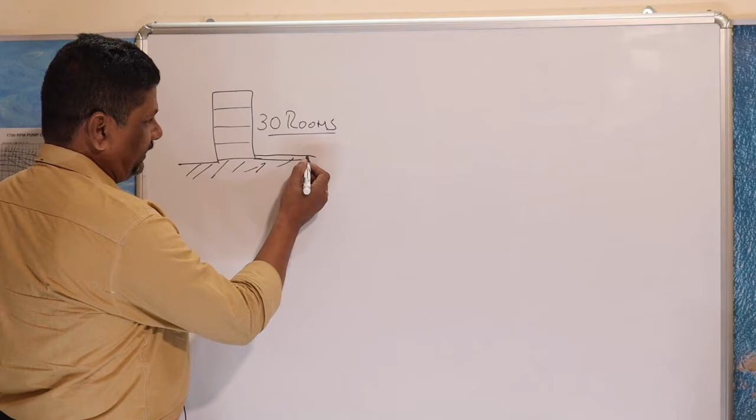So what I'm going to have here is a hotel which has some floors, and this has 30 rooms. We are going to calculate how much wastewater this hotel is going to generate and where we are going to collect it. Probably what I'll have is an underground sump.

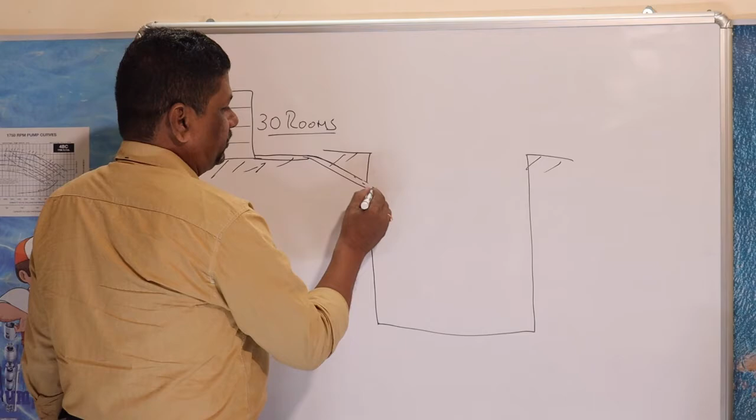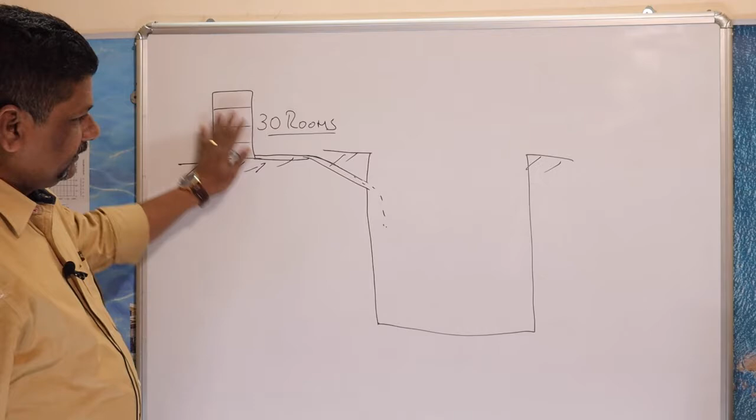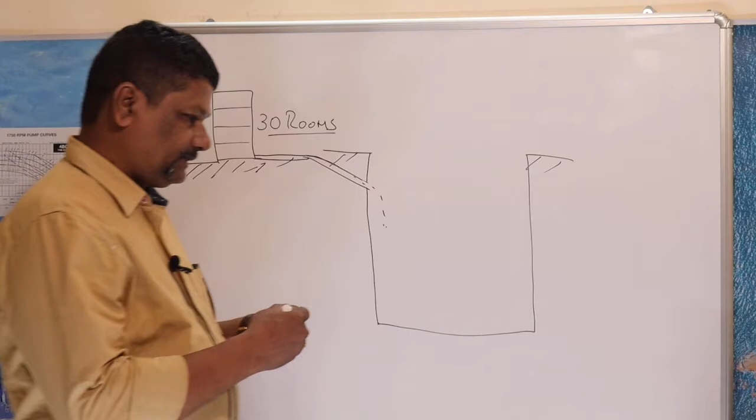Like this, and I will be taking the wastewater here, and the sewage is going to come here. So this is my requirement. I just wanted to explain that I'm going to collect all this sewage or wastewater into this pit, but I need to know how much I'm going to generate from here so that I can design my pit size. So for a moment, just forget this pit - I drew it only to give you an idea about what we are going to do.

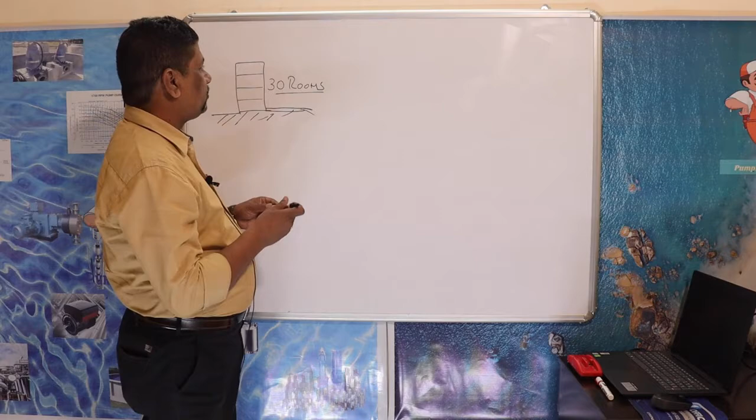Now we are going to calculate. Since it has 30 rooms, the first one I will take is a shower - each room will have a shower. The second, each one will have an EWC, and the third, a wash basin. The hotel will also have a kitchen sink, and the washroom will have a tap point.

Since it is 30 rooms, I am going to take 30 showers. EWC is going to be 30. Wash basin is going to be 30. Kitchen sink is probably 3. And tap is 30.

When you come to water, you have discharge units, and you add all the discharge units together. Remember I told you how to calculate with Hunters, and also how to calculate with BS 6700, using BS standards. The same way, just like discharge units, here we have loading units.

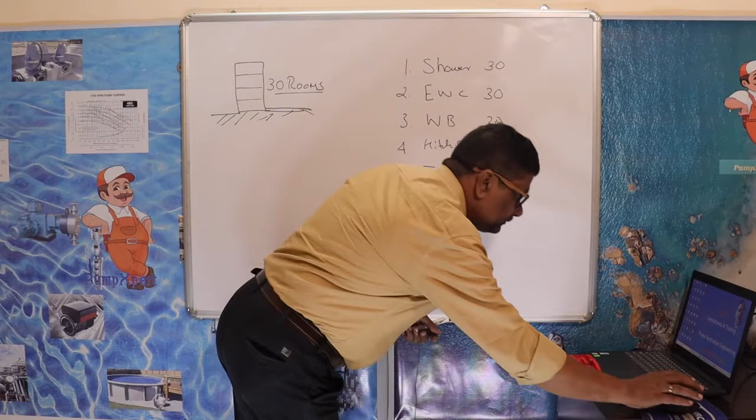Let's check from the table what is the loading unit for shower, EWC, and so on. Then I'll tell you there's a small formula you need to use. So we'll take it as 2.

This is the table that we predominantly use, as per BS 12056-2:2000. If you take the first point where you have the wash basin, that is 0.3, which is called the discharge unit, so we'll take it as DU, and this is 0.3. And the western toilet - if you look, it's a WC with 6 liters - it will be 2. So we'll take this as 2.

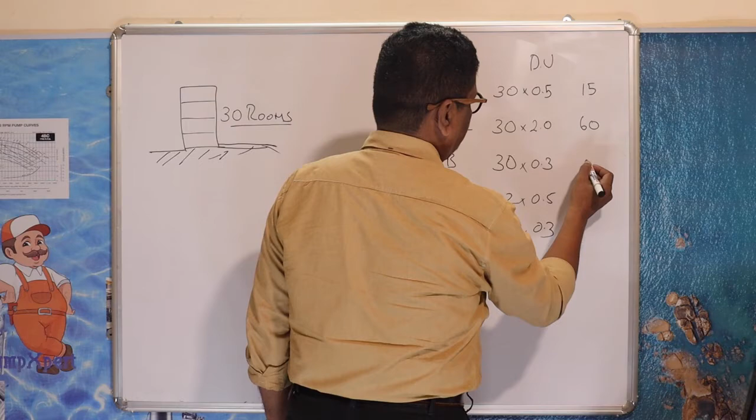So if I multiply all this: 30 into 0.5 is 15. 30 into 2 is 60. 30 into 0.3 is 9. 2 into 0.5 is 1. 30 into 0.3 is again 9. So I am going to arrive at a sigma DU of 15, 75, 84, 85, 94 - so I have sigma DU as 94.

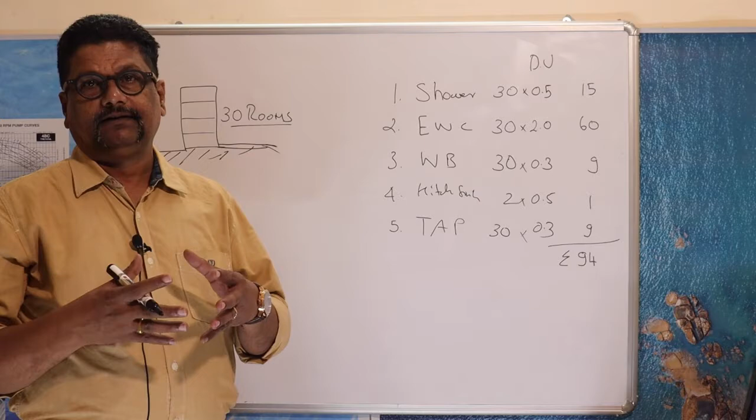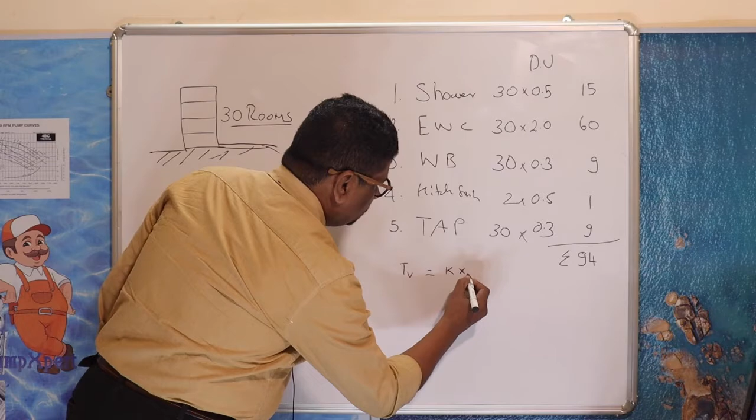But I need to convert this into a unit where I can know what it actually represents, and the very simple formula in LPS is: total volume equals K into root of sigma DU. The K factor here is in the next table we need to see. Here we have hotel, and it is 0.7.

So what I'm going to do is 0.7 into the root of 94. So that's equal to - can you find it out?

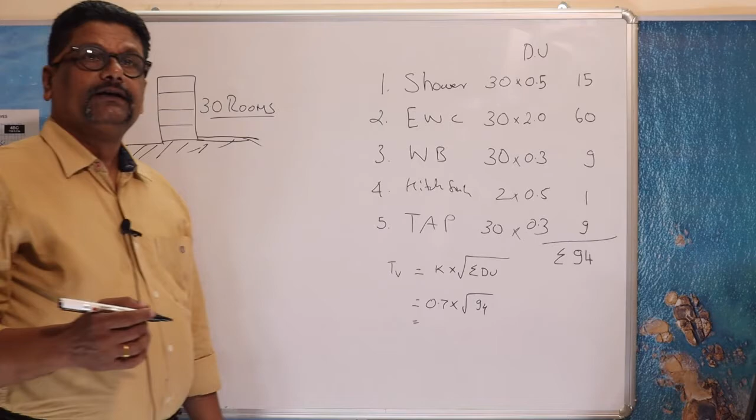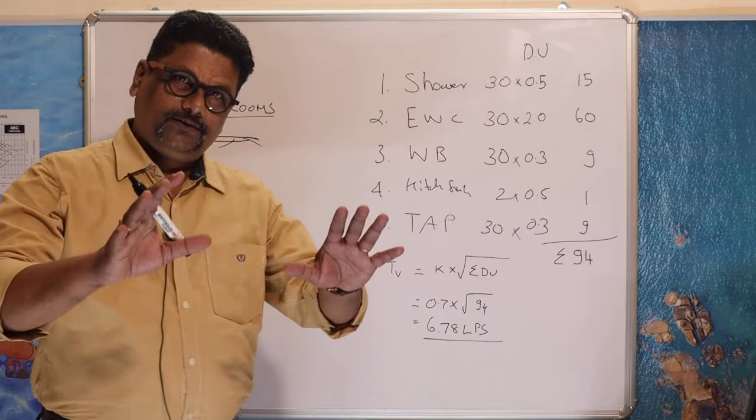6.78 LPS. So now you can see how easy it is to calculate how much wastewater I am going to generate from a 30-room hotel. You can apply this same principle if you have a huge township, or if you're having a hotel with many rooms, like star hotels which might have about 100 rooms.

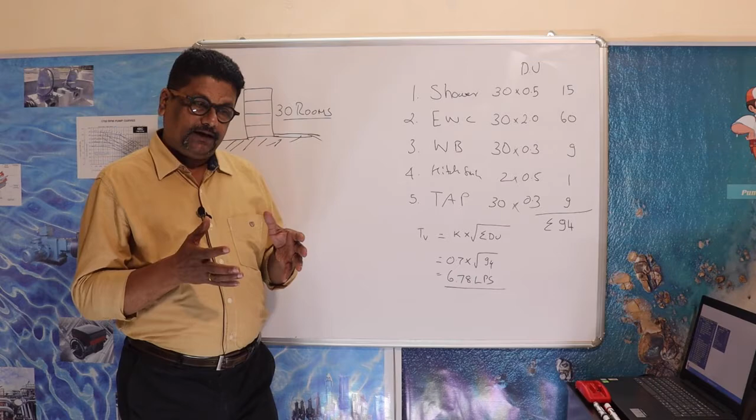You can apply the same thing for resorts. But in a resort, you need to be a little careful about dimensioning all this. Probably in one of my lectures, I will take a resort as an example and application, and we'll calculate the water demand and wastewater demand separately, because it has a lot of varying demanding factors.

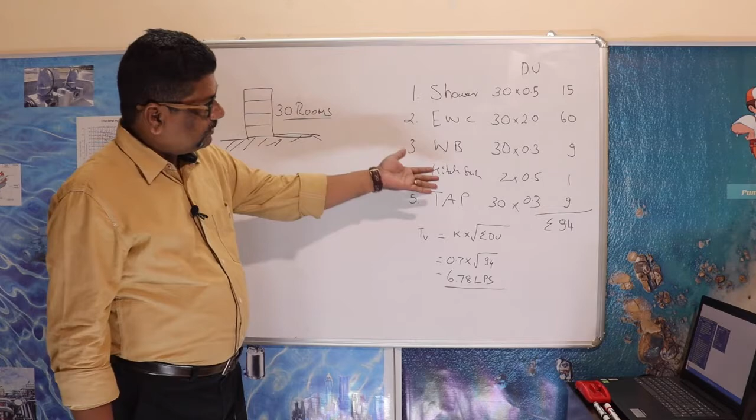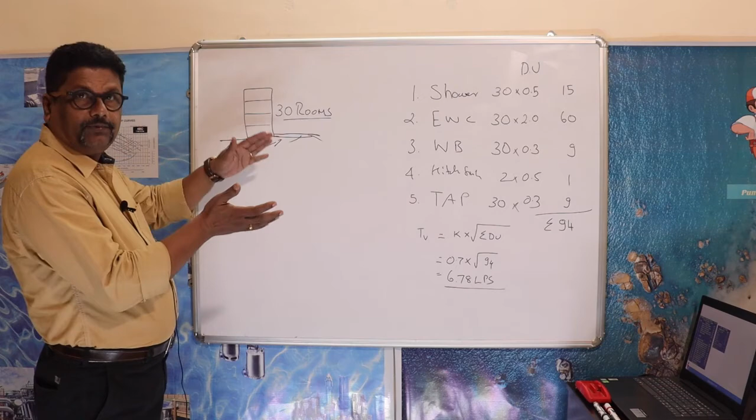But here, you can take this as a 30-room hotel, or a flat which has so many washrooms, and you just put that all calculated and arrive at 6.78, which is your peak demand for wastewater. In the sense, when the hotel is in operation and the peak demand for water is between 7 to 9 in the morning, you get the same kind of peak demand in the wastewater generated. So that's about 6.78 liters per second.

And now I have got the flow rate. With the flow rate, can I design a pumping station, or no? What other information do I need? We will see that later, but now I have this 6.78. I also need to calculate the head, because only after getting my flow and my total head will I be able to select a pump. And the selection of the pump becomes very, very important when you have to design a sewage pumping station.

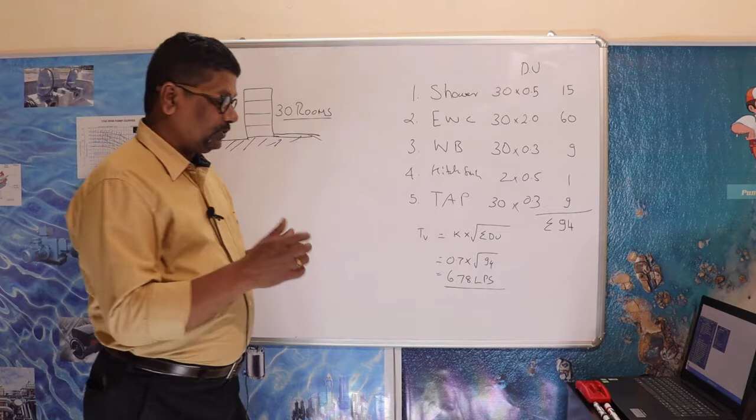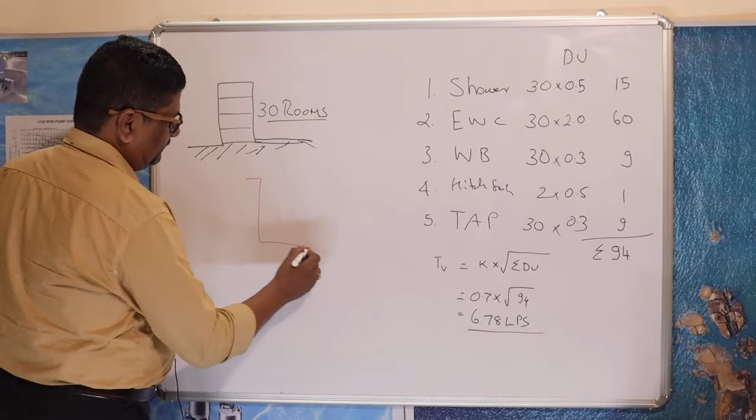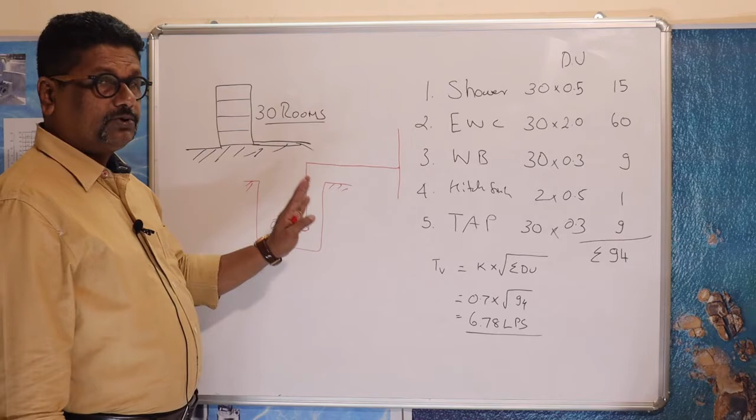So in this example, what I'm going to do is calculate the head. As you can imagine here, I have a pit, and I'm going to put a few pumps, and from these pumps I'm going to pump it. I have the sewer line here, and I'm going to put it into the sewer. This is going to be my system. I'm not taking the STP and other things into consideration. I'm just taking a simple example to show you how to calculate everything, and once there is an STP, that's going to be a different calculation.

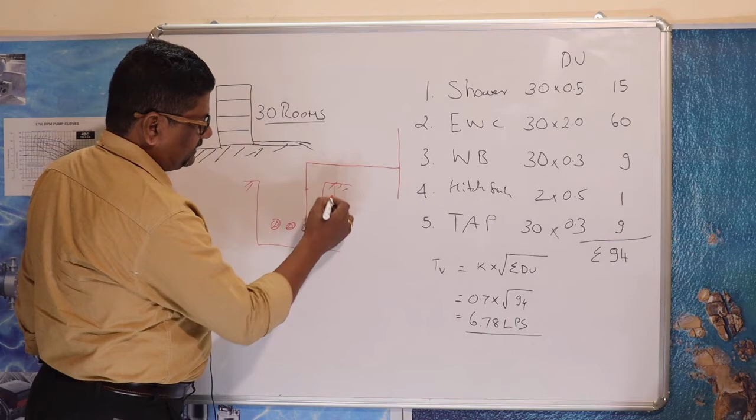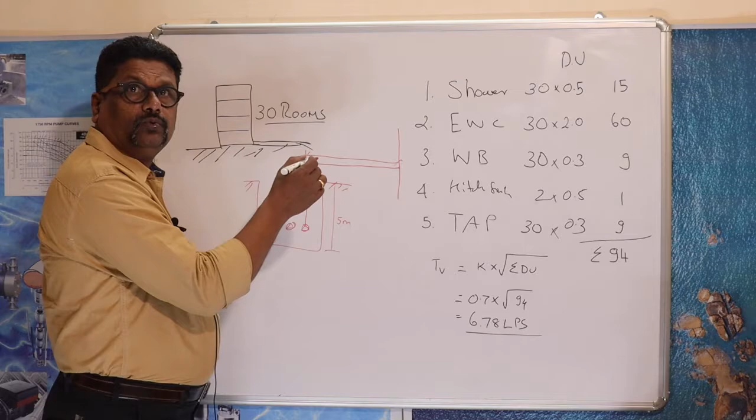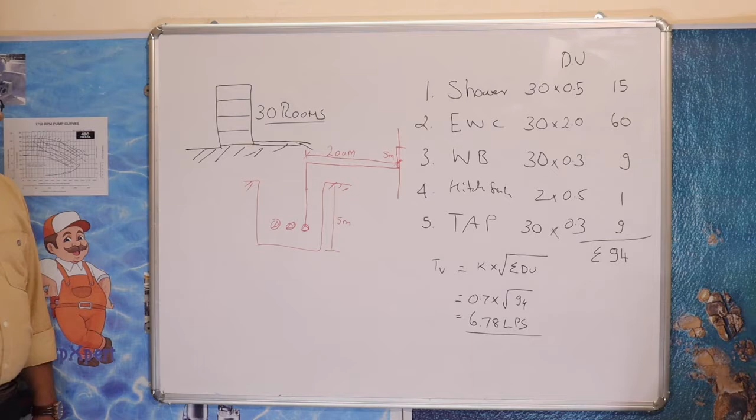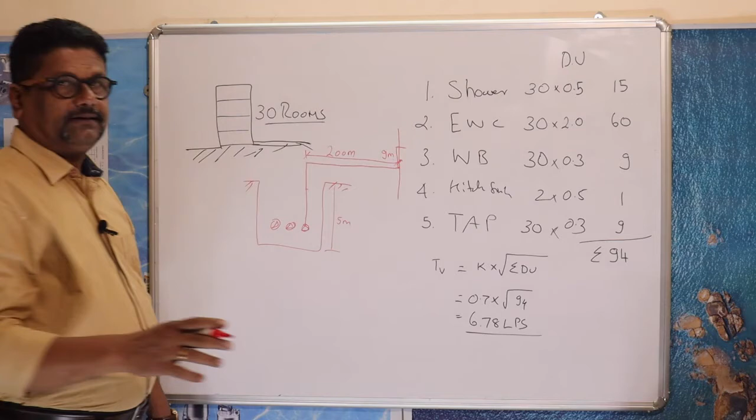So what I'm taking is, I have approximately some depth. Let me set this for calculation sake - this is about 5 meters, and the horizontal distance is 200 meters you are going to go. And probably somewhere I might also have a little elevation, let's say it is like this, and this is about 5 meters, maybe, or we are just going this 9 meters. So it's all an example that we are taking, in the sense I just wanted to give more detail so that you know how to calculate it.

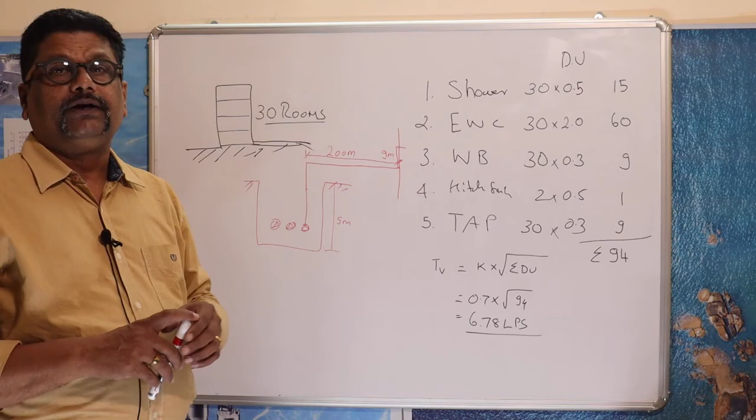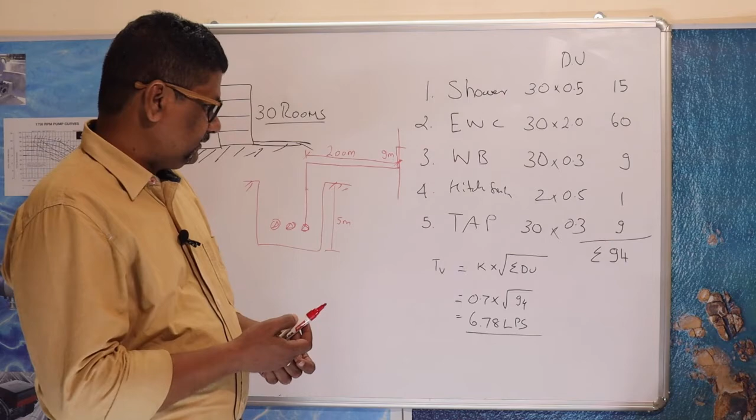In water, we did a friction loss calculation using the Hazen-Williams formula. And in a similar way, we are going to calculate what is going to be my friction loss, and I'm going to have 6.78 liters per second of flow. So what we are going to do now is convert it into meter cube per hour so that it's easy for us - that's 24.408, so 24 meter cube per hour, and this is going to be my peak demand.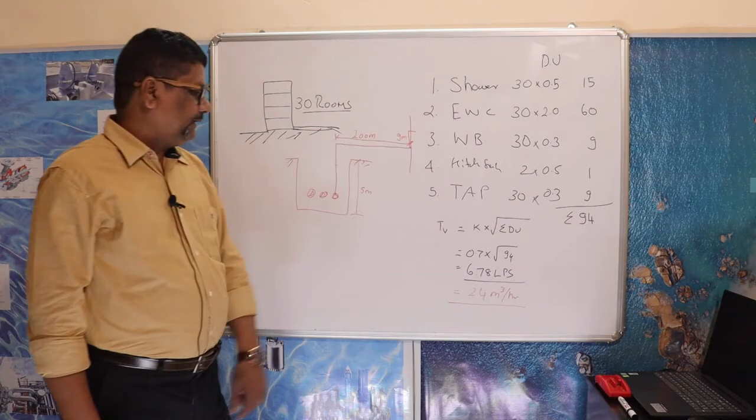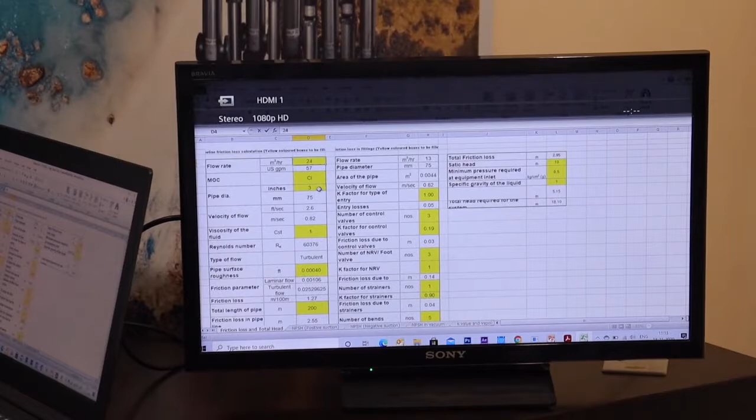So I'm going to substitute this into the friction table and see how much the head is going to be. So what I'm doing here is 24, and I'm using a 3-inch pipe, where the velocity goes up to 1.51, which is quite high. So what I'll do is try changing it to 4 inches - yeah, I'm getting a velocity of 0.85, that's okay, and I've taken the flow as turbulent, and here I have 200 meters. So my friction loss in the pipe is 1.91.

Now I have 3 control valves, for example, because I think what I'll be doing is having 2 pumps working and 1 standby, so that it becomes easier for me to explain the factors. So all that I put in, I get 43, 2.34, and I have a static head of 10 - which is not the case because this is 5 plus this is 9, which is 14 meters. So I have a head of 14 meters, and I need the minimum pressure at the discharge point to be 5. So what I am arriving at is about 22 meters head. So we need to select a pump which will have this 24 at the rate of say 22 meters head.

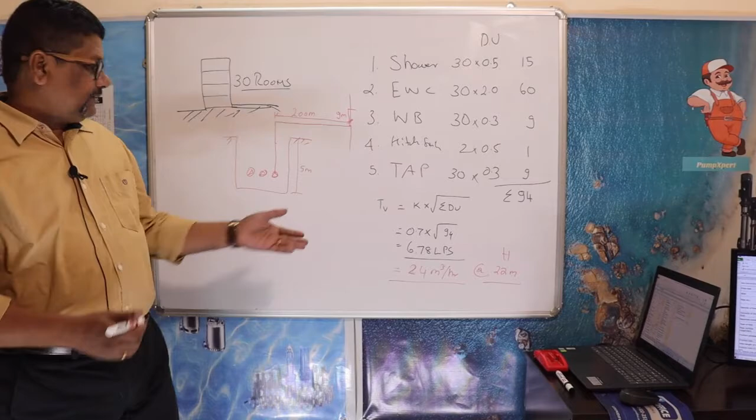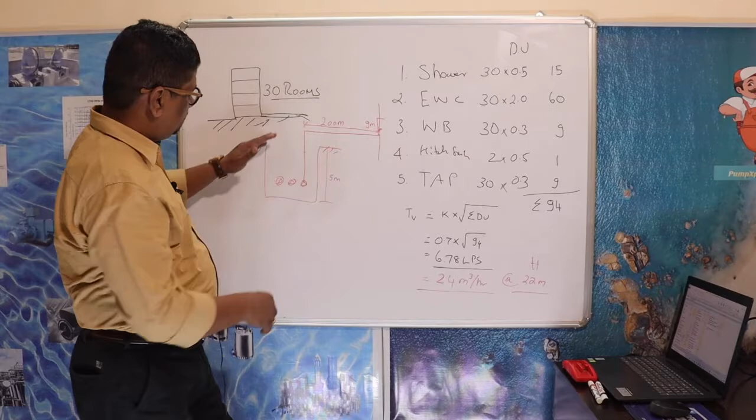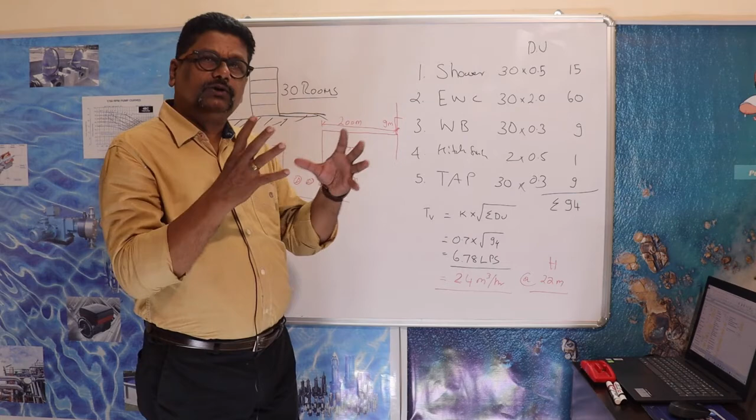So I have arrived at what is going to be my flow and what is going to be my head. But why did I do this first? See, there are so many aspects to designing a sewage pumping station, and one of the aspects to get it right is to select this pump. And I'll tell you again, this might not be the right selection, because if you select the pump and put it, and this dimension changes a little bit, your static head and your geodetic head will change, so it will be close and the changes will not be major. So we have to select a pump for 24 at 22. But why am I selecting that pump?

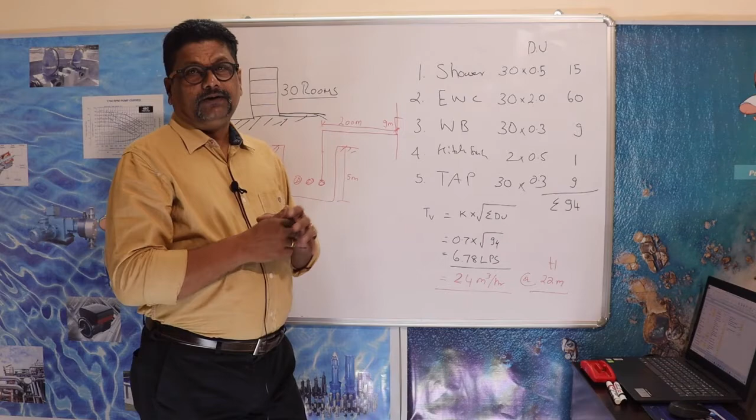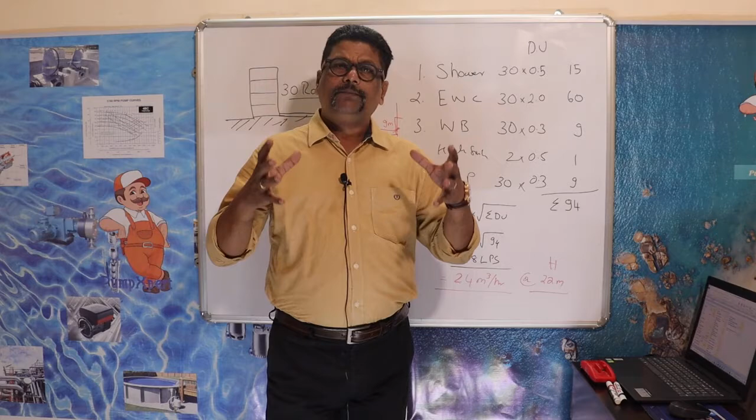The pump has a volute, and the diameter of the volute plays a very major role when you want to design a pumping station. It is one of the major roles. So I need to have that first, and after that there are other things like effective volume, what volume I'm going to pump, what is my dead zone or dead volume, and how I'm going to reduce it. Most important, when it comes to sewage, you need a good idea about how many starts and stops your sewage pump can handle per hour. Just go through the manufacturer's catalog and find that out, because that plays a very major role when designing a pumping station.

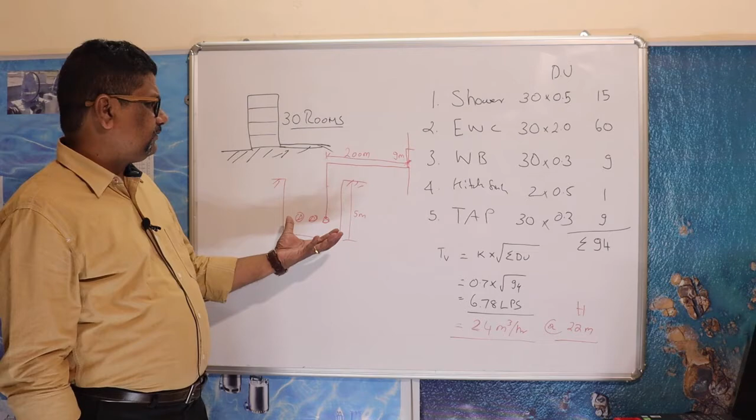Why are we taking so much effort in designing this pumping station? It's a very small one, 24, and I'm going to pump with two pumps working, one standby, which is 12 meter cube per hour at a head of about 22 meters. Why do I need to take so much care about it? If you don't take care of your sewage pumping station properly, you have all the problems, and sewage stinks. So better take care of your sewage pumping station design.

There are very small pumps. I don't know exactly how many kilowatts this pump is going to be, but I'll bring that up in my next episode. The first thing I wanted to tell you is how to calculate the wastewater generated from this 30-room hotel, put all that in the table, come to this formula, and arrive at your peak wastewater that can be generated from this hotel.

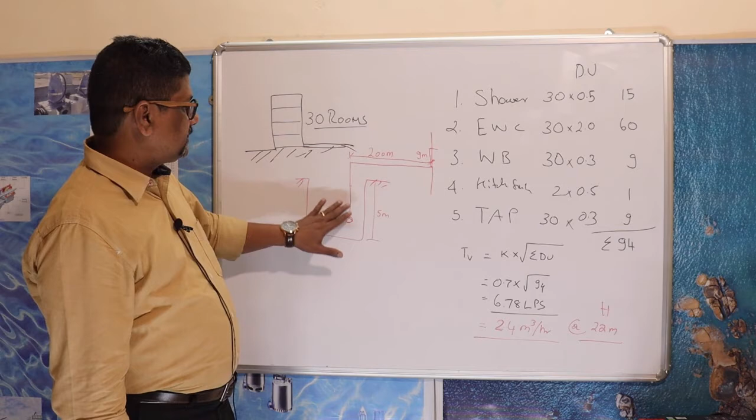And this we are putting into the station, and now we calculated how far I am going to push it, and I calculated the friction losses. We took the bends and other things into account, and we arrived at the Q and H.

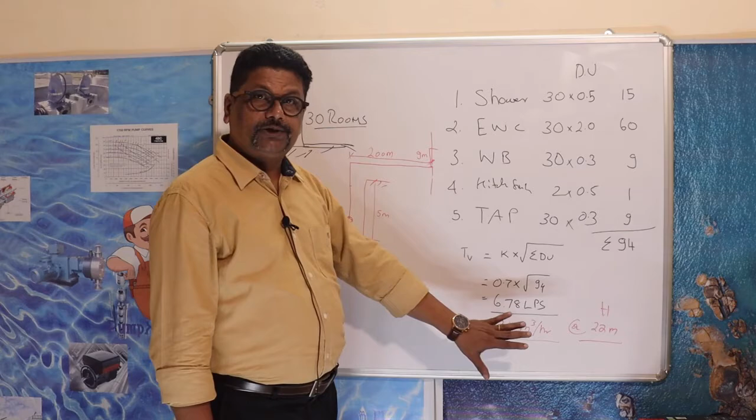There are so many questions in you now, like why this volute diameter is important, what is the distance between the two pumps that I need to maintain, and what will happen if I do not maintain the center to center distance. In many places, I don't want to name them, proper care has not been taken for that installation.

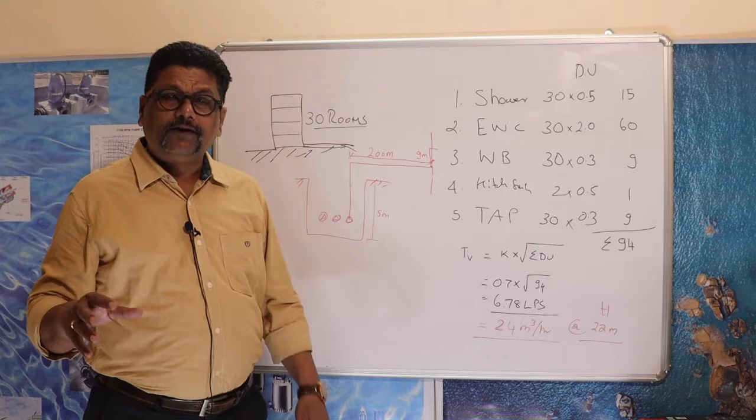I have seen places where the pumps are put freestanding, and they are not standing, they are sleeping. The simple thing is that they have not calculated what the turbulence effect would be in that place, and they put it close to the wall, and the pump got damaged. So in sewage pumping, you need to be very careful about where I'm going to place it and how I'm going to place it.

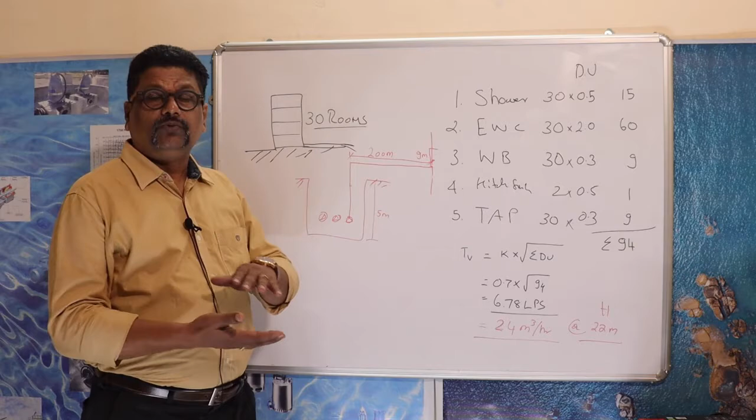In one of the industries, I can tell you, they put the pump above. The explanation people gave me is, below there will be silt, so we wanted to protect the pump from the silt, so we took it up. And that's the worst thing you can do. Your pump is there in the pumping station to pump out all that silt, and you don't want dead zones in your pumping station at all. So that is how you need to design a pumping station.

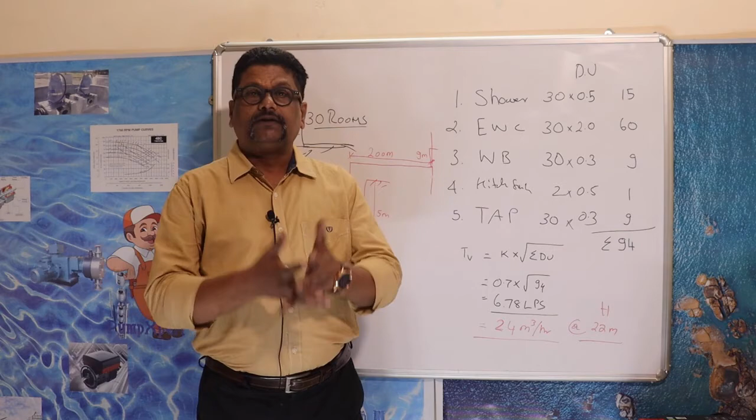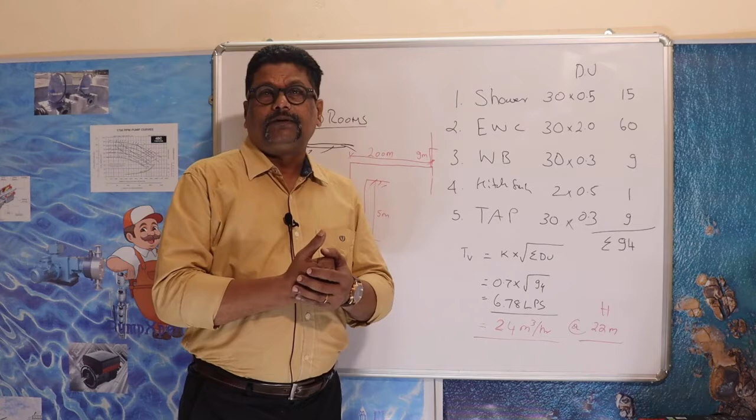Next we will talk about how far from the floor I need to place my sewage pump, and why I need to place it there. And the foremost question everywhere people ask me is, can I put a sewage pump using VFD and save energy?

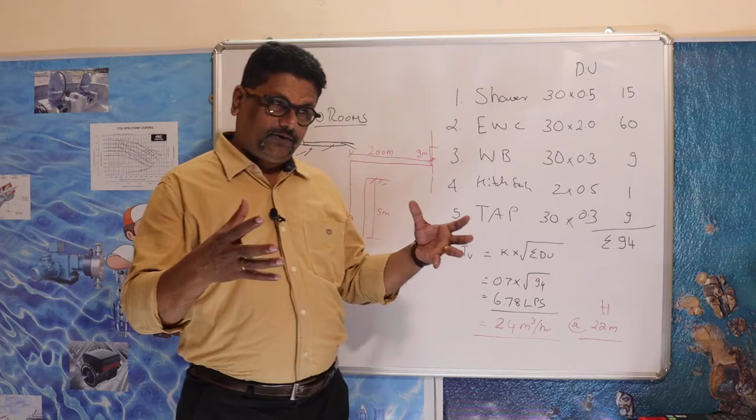We will be covering a lot. As I told you earlier, this is going to be a very interesting subject, and only if you follow from the beginning will you be able to understand the entire thing. But if you want to know more about this, you are welcome to join our course and learn a lot more, doing some practical exercises so you can work on a live project and see for yourself how you can design a pumping station and all that. This is just a very small pumping station where we want to give you an idea about it.